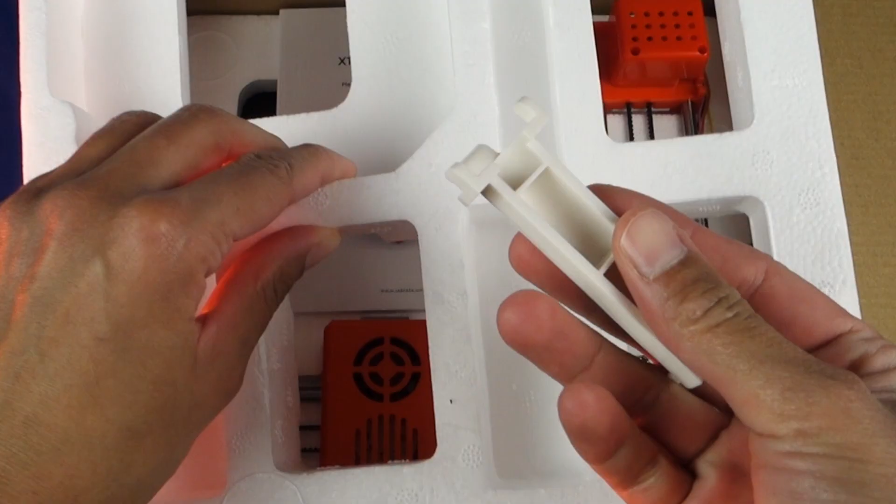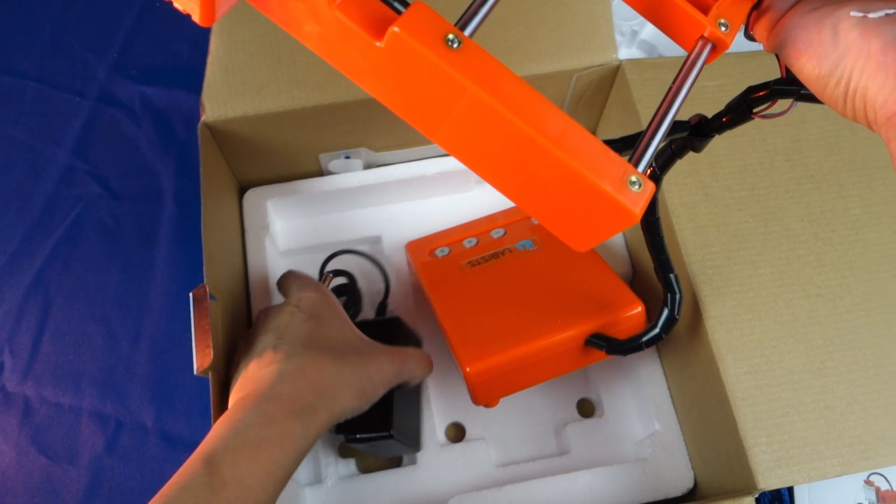When I first opened the box, I was surprised to see just how few parts were needed for the assembly. Most of the parts were already wired and it looked like just a couple of components needed to be assembled. Also, the interface system was simplified to only use 3 buttons, which is a unique take on a 3D printer.

The only component which needed to be assembled was the Z-axis, in which you put the wiring through the opening before attaching it with some screws.

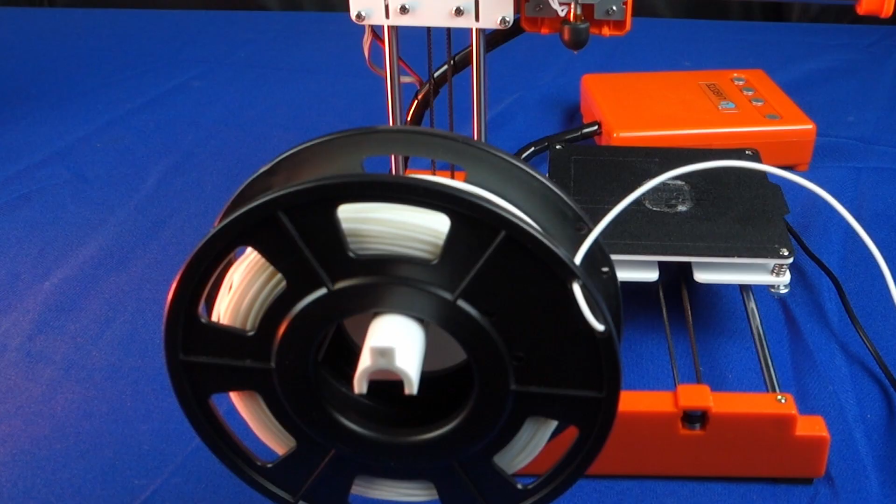After that, all you need to do is attach the filament spool holder with another 2 screws. Now, this machine is designed to work with smaller spools, so this will mean that the user will have 2 options when using this machine. Either you can order the spools which are the same type, or you can order a separate spool holder which will hold a regular size 1 kilogram spool.

For my setup, I used a separate spool holder since this was easier for me to work with. However, doing so did increase the footprint of the machine.

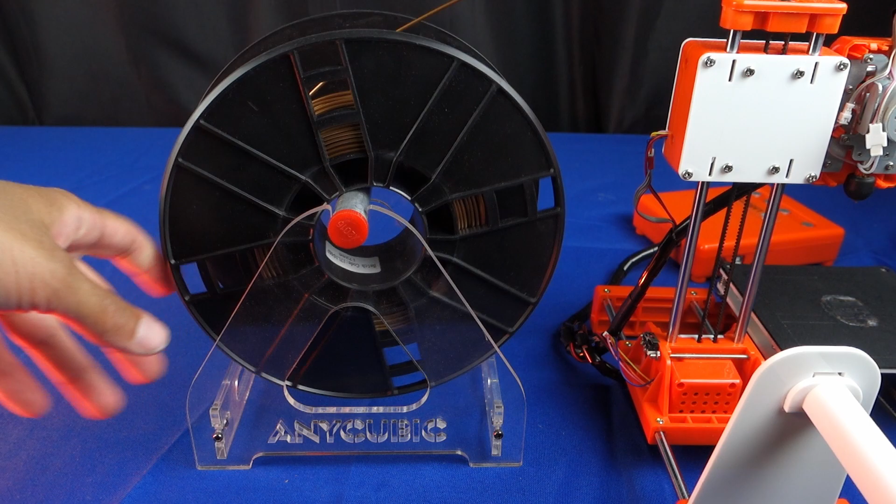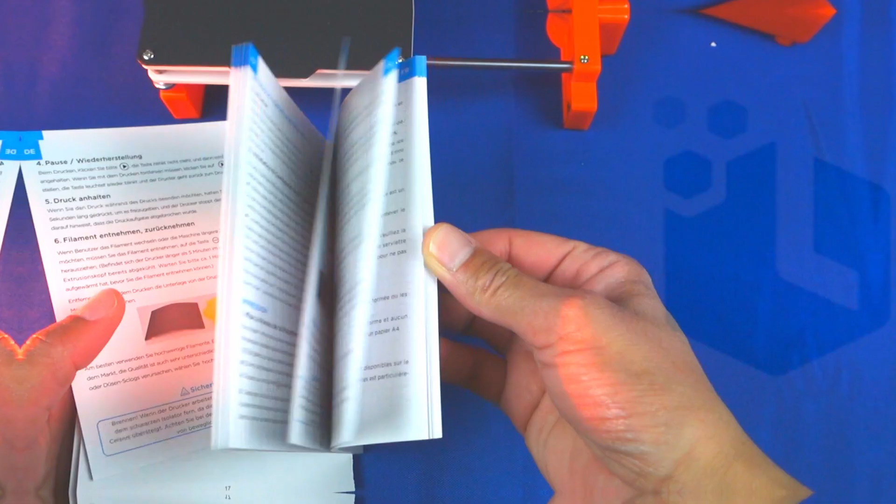The instruction manual that came with the machine was well written, even if its binding wasn't the greatest. The good news is that the machine came with an SD card which has a digital version included. If they can replace the binding in future products, it would greatly help polish up the user experience.

Like most printers, this one also came with preloaded printable files, which you can start printing immediately with. Important to note is that since there isn't a menu system on this machine, I would highly recommend just having one file that you intend to print on the SD card at any given point in time. This does make it more difficult to streamline prints, however, this does simplify the printing experience.

This machine is mainly geared towards novices, so keeping this in mind, I will be giving 2 separate verdicts as a result. Now, although some of their advertising shows children using this machine, I would never recommend a 3D printer be used unattended by an adult, let alone a child, since several safety issues could arise.

Some of these include the fact that this machine doesn't actually possess a power button, which in itself is problematic. The only way to currently turn off the machine is to unplug the power supply either from the control case directly or through the wall socket. In my case, I used a power bar to achieve the same result.

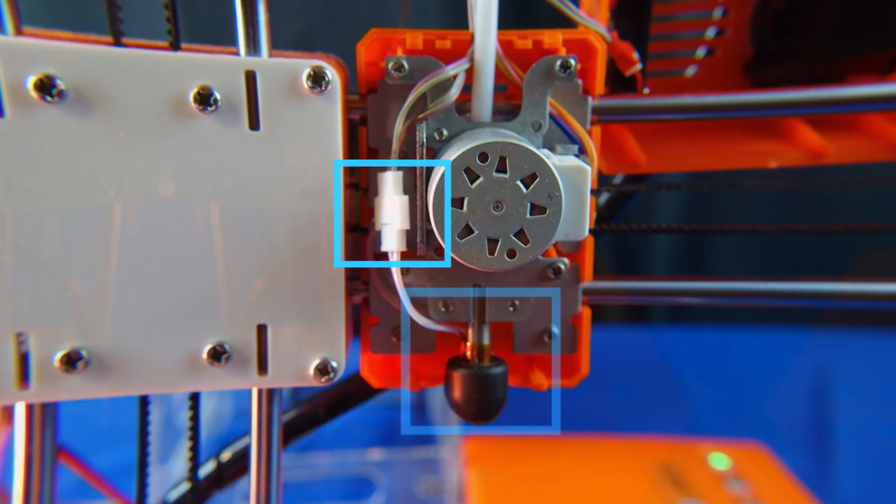The thermistor was simply taped to the custom heating portion and also used a connector for easy replacement, so I was able to test thermal runaway protection. Thankfully, this machine does have thermal runaway enabled, which is great news considering that the firmware can't be easily modified, and we'll go through that in more detail later on.

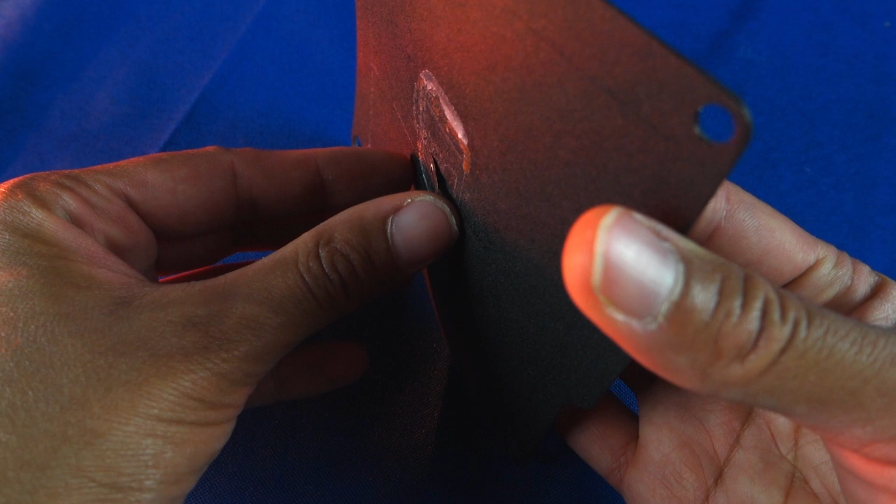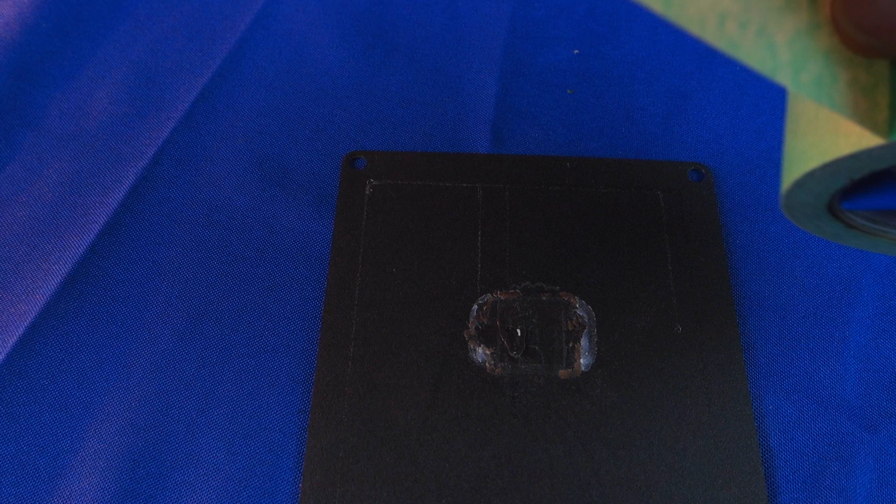This machine does feature a magnetic flexible build plate, which is great, however, it tends to be way too sticky. As a result, you can see what will happen if you don't take proper precautions. To prevent this from happening, I would highly recommend covering the build plate with some painter's tape, since the prints will stick just as well to that surface and you can simply replace the material afterwards. Doing this will help lengthen the longevity of the build plate.

Now, at the time of shooting this video, they were sold out of replacements. However, you can normally buy a replacement build plate if this one does become damaged. The build plate also isn't heated, so you'll be limited to either PLA or lower temperature TPU filament, which is fine for most people starting off.

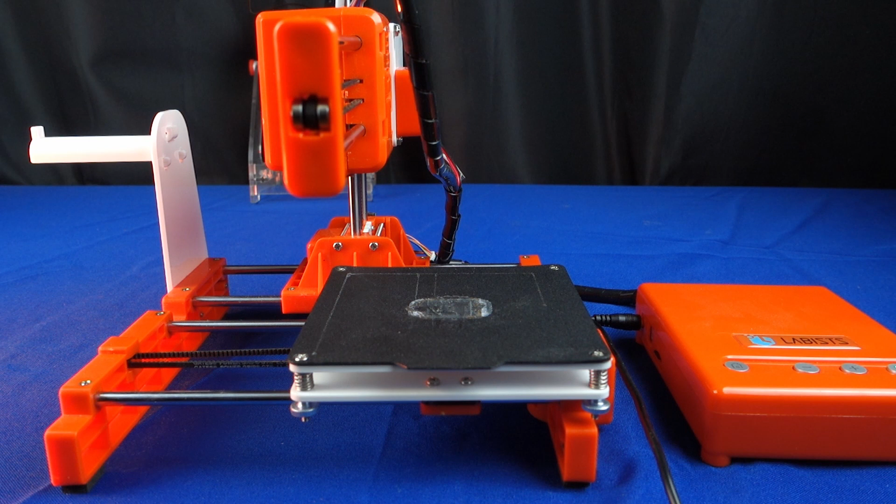Before you start printing, you'll definitely want to level the bed, since this is normally something which isn't perfect when a machine comes out of the factory. To do this, you'll need to press the home button to move the machine to its home position.

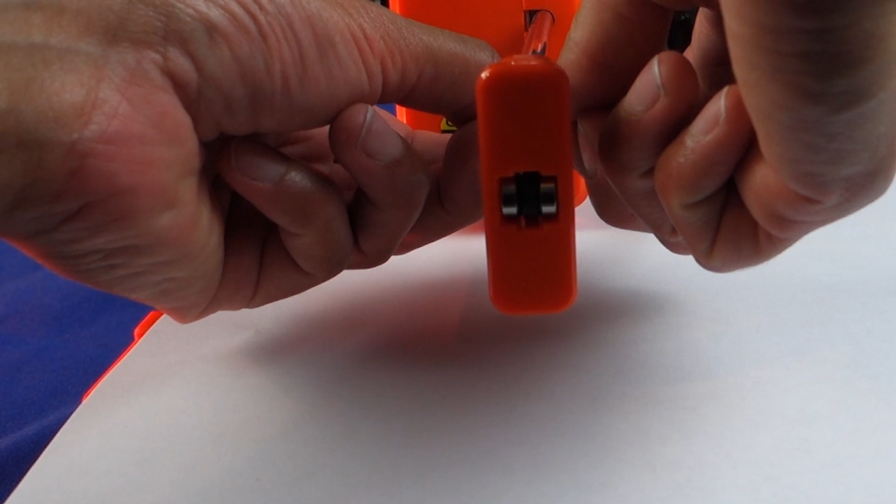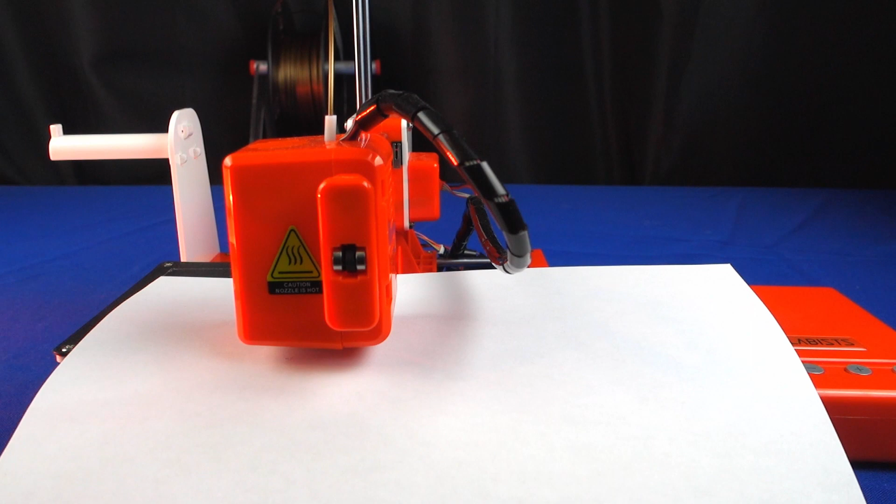Make sure to place a piece of paper in the top left hand corner of the build plate before you do this. Using the adjustment knobs, you'll either tighten or loosen these until you're just barely able to move the paper. The only way I was able to move the nozzle around the build plate was by turning the belts themselves, so if you do this, make sure to be very careful since obtaining replacement belts wouldn't be easy given the initial design of this machine.

If you decide to stick to the software that came with the machine, then slicing should be pretty straightforward. However, if you prefer to use a more mainstream software, then getting the machine calibrated can be somewhat difficult.

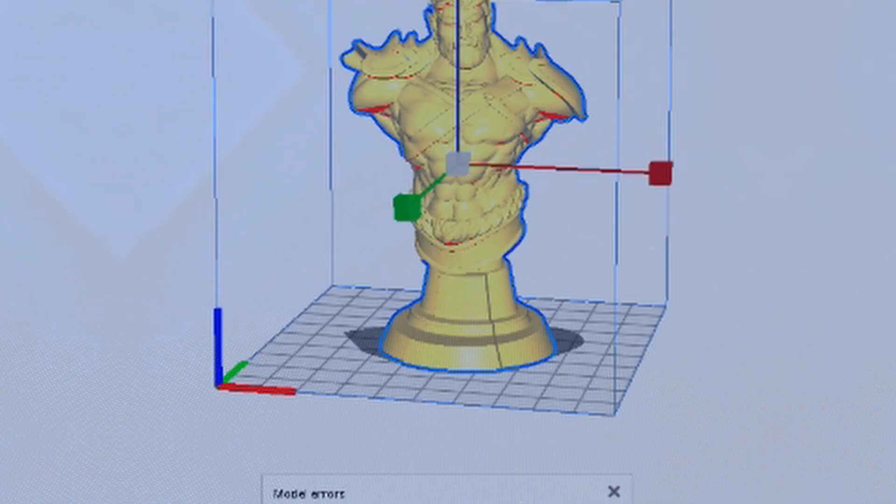These are just a small portion of test prints that I went through to calibrate, but there are some key components that will make your life easier. First off, this machine isn't designed to go fast, and since it's a direct extruder, you'll want to make sure that the retractions are turned on.

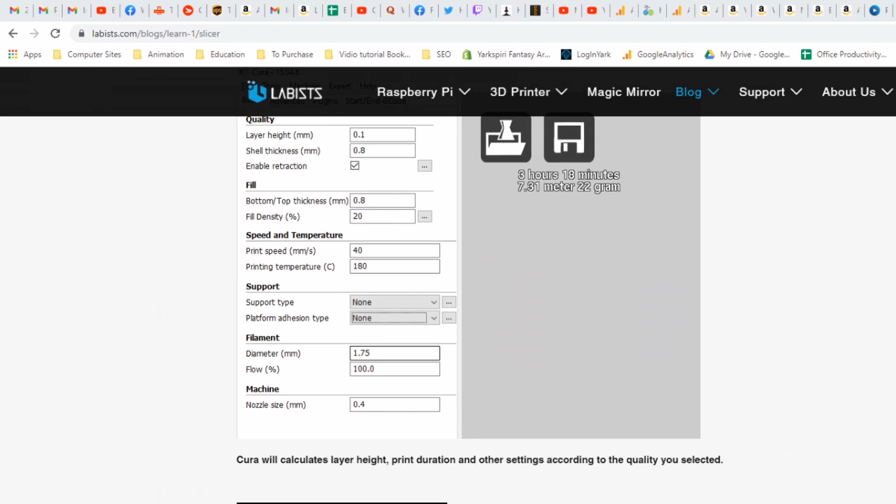These are the settings that I ended up using on my machine. These settings will need to be tweaked for your particular device since both each filament and machine tends to have its own nuances. The main website also does feature some recommended settings, so those will also be a good starting point for your printer.

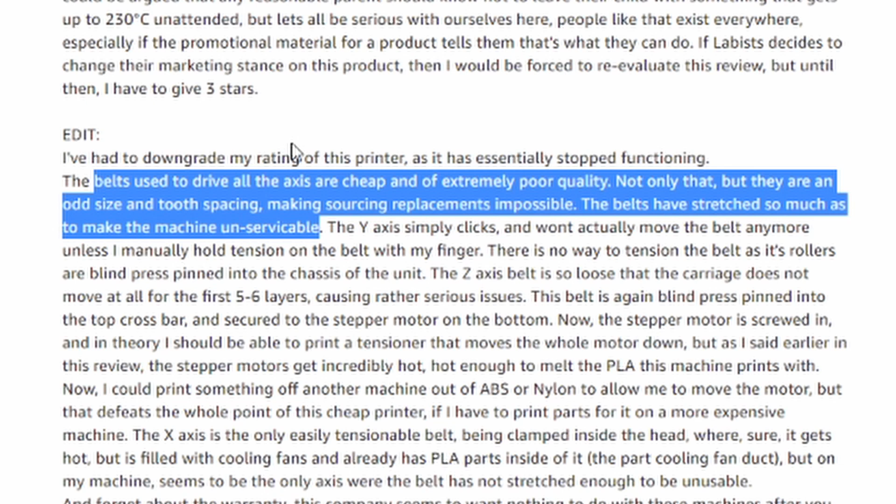Now, one thing I did notice is that there's some design choices which could be problematic if repairs or upgrades are needed. One user mentioned that the belts are non-standard, which could be a very big issue should one of them break. Another issue is the firmware, since the company hasn't shared the source files. This makes any upgrades or adjustments an issue in the future.

So as such, this machine really isn't geared towards a tinkering mindset. The nozzle itself seems to be attached using a method which I honestly didn't feel comfortable disassembling, since it didn't seem like it was intended to be replaced easily.

The thermistor, however, does appear to be easily replaceable so long as you know what type is compatible with the machine. Once again, we don't have access to the source files, so we can't actually check to see which ones we need to get as replacements.

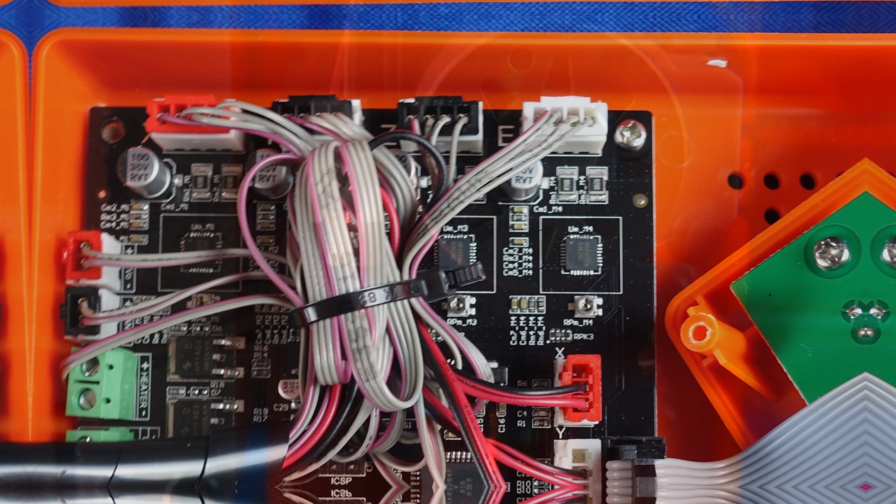The stepper drivers are soldered to the board, which makes the connections more reliable. However, replacements would be much more difficult since it would involve desoldering them and finding compatible replacements. To the company's credit, the machine components are fairly easy to open up and access, so if repairs are minor, it may still be possible.

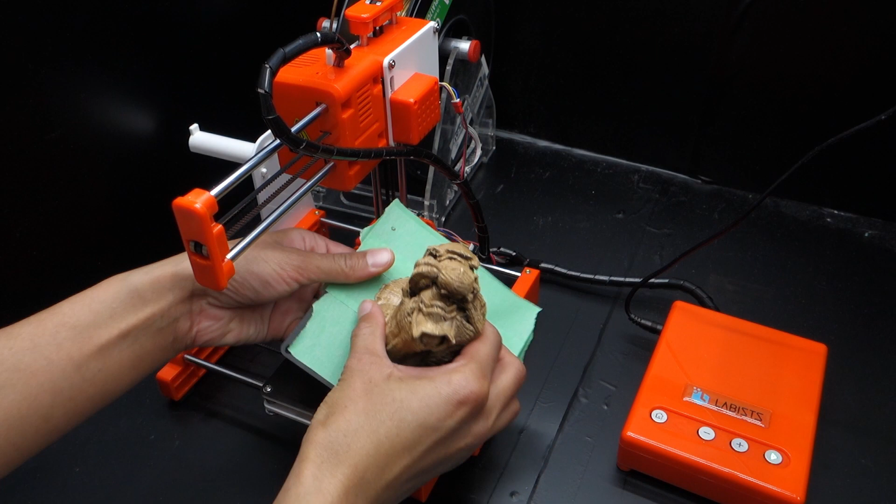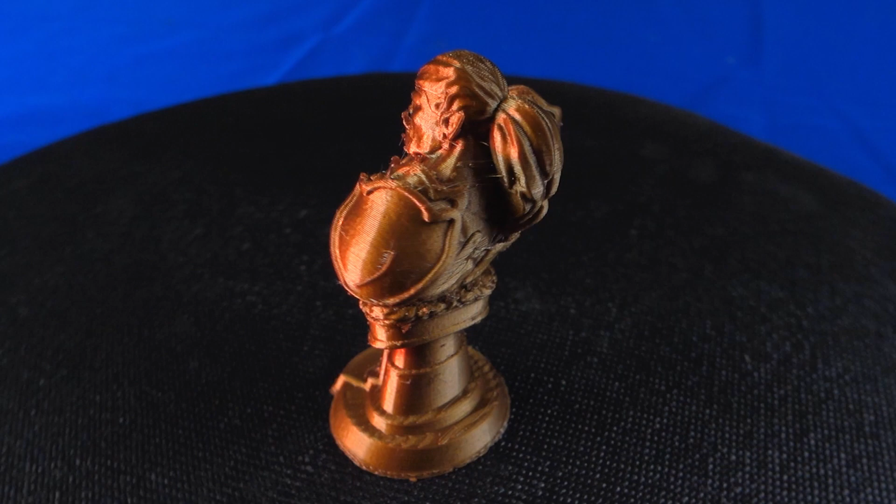Now, how did the prints compare to other machines? Well, this is where some of the issues start to creep up. No matter what I tried, I got a messy base on all my prints. Overhangs clearly suffered from poor cooling, and from closer inspection, I would say it was the design of the layer fan, which seems to only be cooling the top side of the prints.

Also, this machine isn't the quietest, so having it in the same room that you're sleeping in would not be the greatest idea if you're running a long print.

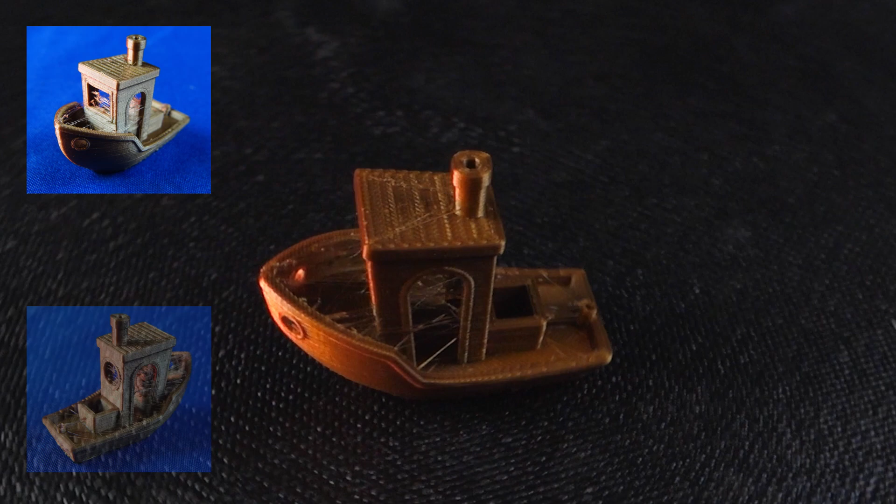Once again, since updating the stepper drivers and firmware aren't an option, we'll be limited to what comes stock with this machine. As long as you turn off your retraction settings, you should end up with decent quality prints for the price point. So is this machine really worth the money?

If you're just starting off and don't know if it's something that you'll want to keep using, then it's a pretty low risk option. However, if you intend to modify or use this machine for any type of production, then I would spend a bit more to get a device which is both repairable and upgradable. Nowadays, there's quite a few options out there for a very affordable price.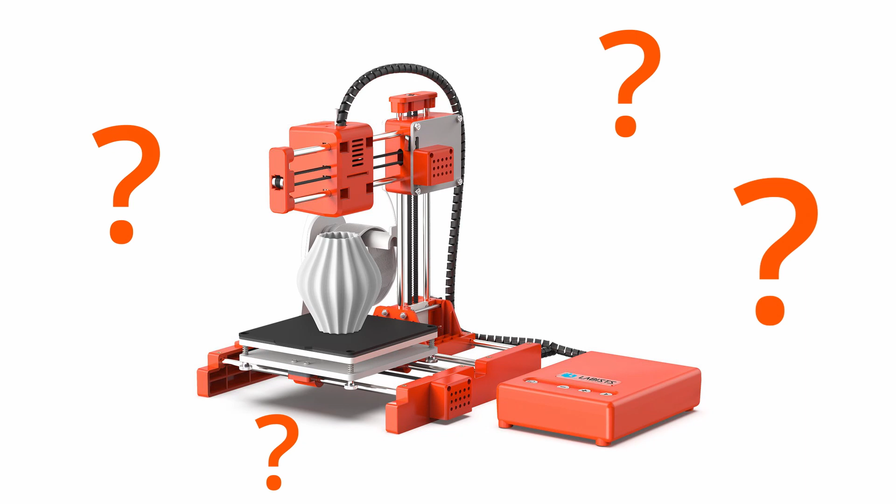Here's my final verdict. For a novice, I would give this a solid 6 out of 10. It works well as long as you know how to take care of it. If you're a tinkerer or using it for production, then I would give it a 3 out of 10 since it will be very limited in its use cases.

So although I see this machine having quite a bit of potential, I do find that there's better options out there.